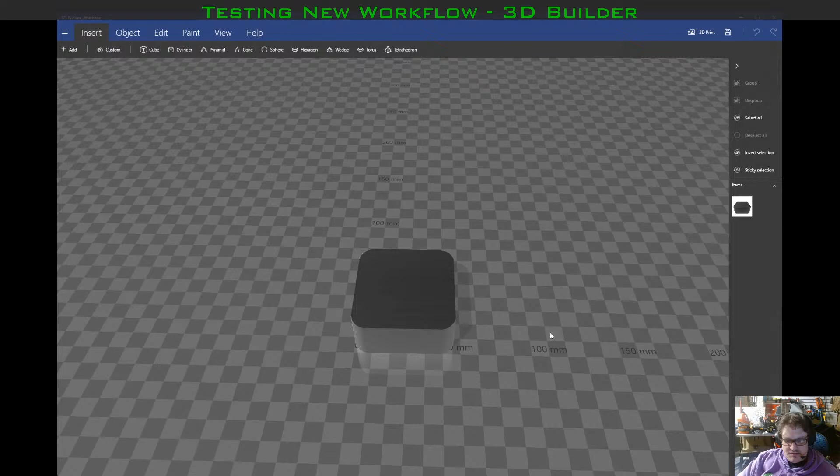Now we are going to go to Microsoft 3D Builder. Insert, add, load image. Base. Turn on the inverse. Alright, so this is the base that we're starting off with. This just started off as the thing that Microsoft Paint imported into 3D.

So we're gonna probably make this 4 millimeters thick. And the model that I based this off of has some screw holes to screw it on, and then a post that would come out for the mixer. So I'm going to use some calipers, measure the width of this post, maybe even just the opening and the thing.

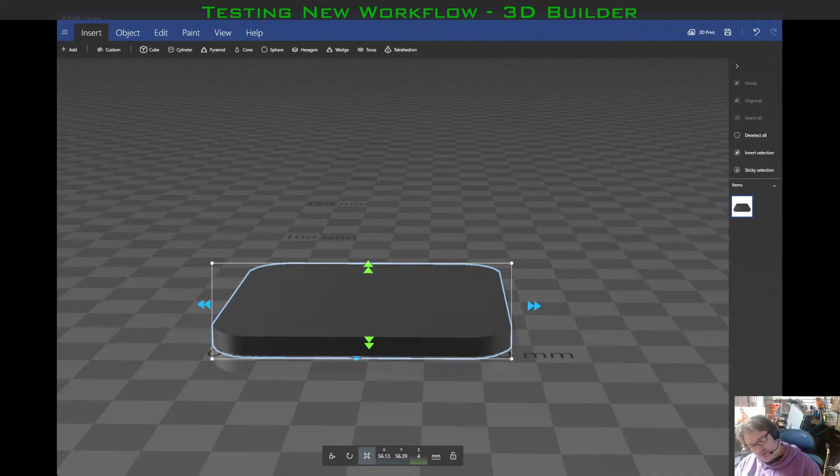I did scale down that original design a little bit in order to get it to fit, but alright, so the opening here is 11.88 millimeters wide. Okay, this is 11.4 millimeters wide. Let's go with 11.5. I think if we did 11.5, we could probably get away with it. Yeah, 11.5 seems to be a good starting point. Okay.

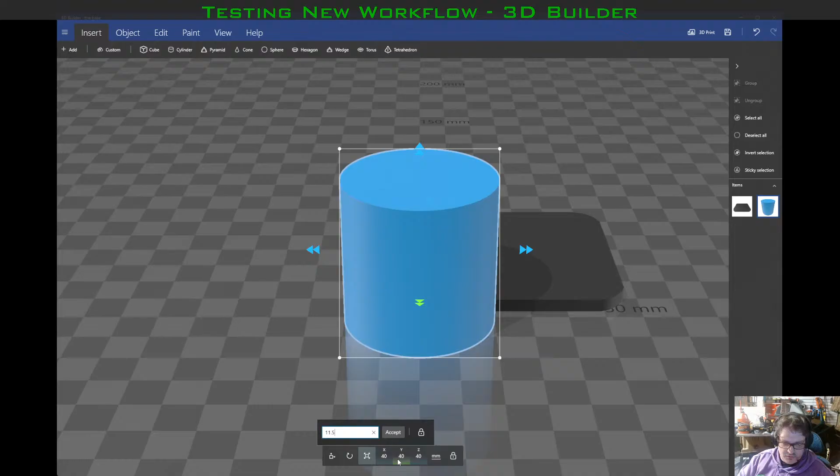So, insert a cylinder, scale that to 11.5 millimeters. And unlock the scaling. Drag it to about the middle of the thing here. Like the middle.

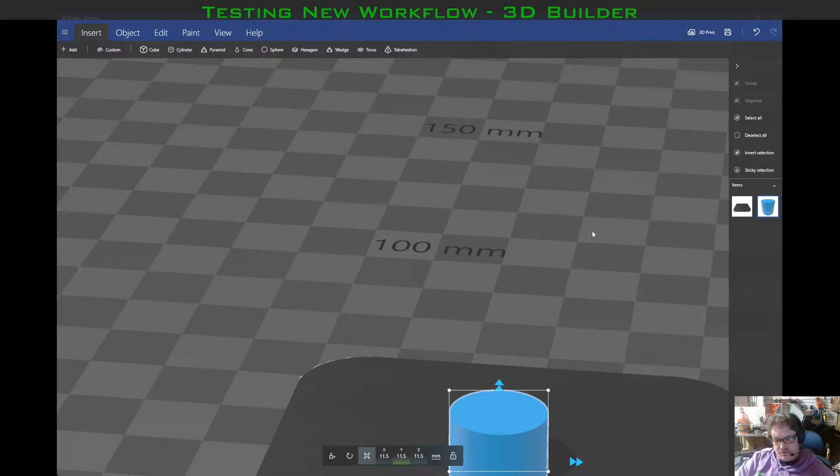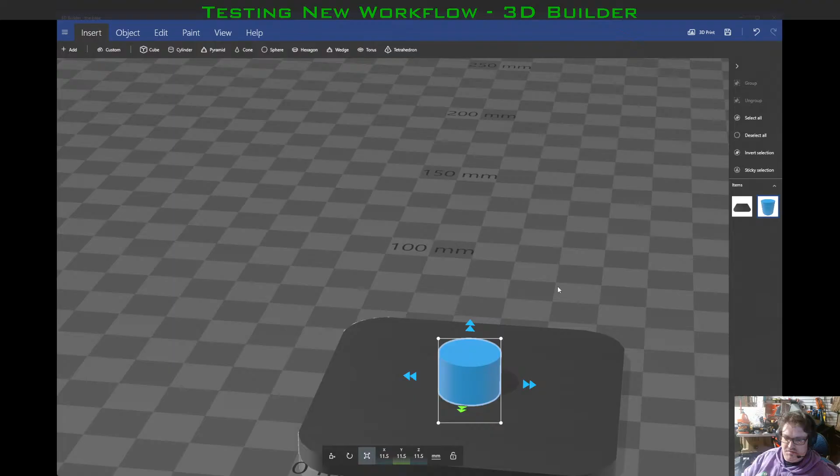And then, alright, so this is going to basically hang like that. So probably, if this were to end here, probably gonna want to give it 37 millimeters of height. Seems about right. Okay, so let's extrude this up to 37 millimeters. 37 millimeters of height. Okay.

And this model is about 4.19 millimeters from the tip of it where the jutting out starts. Which makes sense. Is that 4 millimeters? Yeah, it's about 4 millimeters.

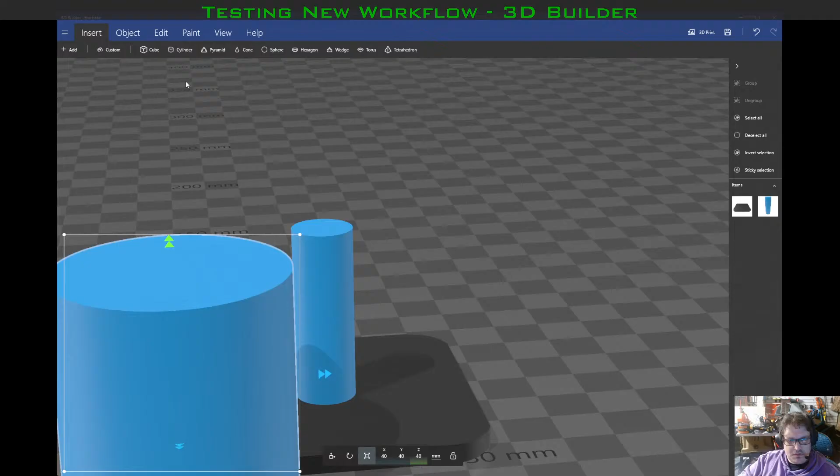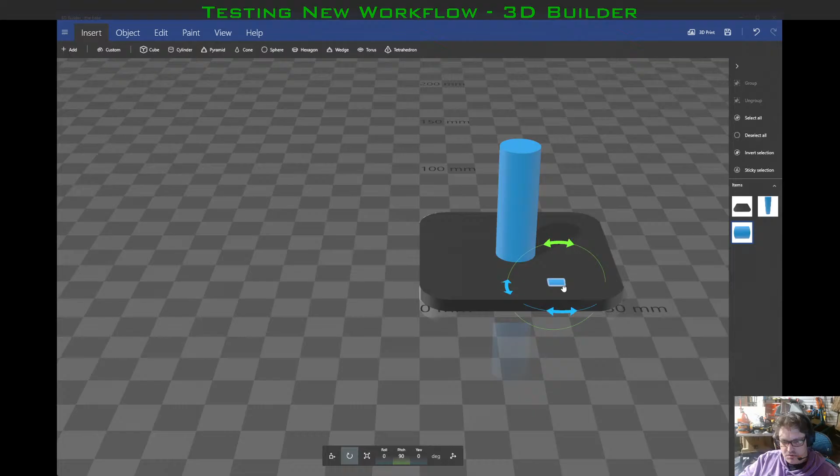Alright, so I'm going to insert another cylinder. Lock it. I'm gonna set it to 4.4. Rotate it 90 degrees. Stick it on this. Alright, so it's got to be 4.4 wide. How deep does it need?

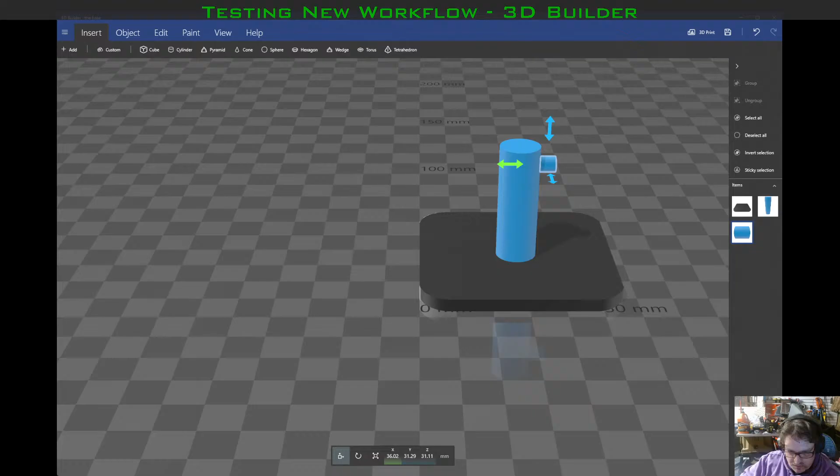Let's see here. Probably be... let's go 2.85 deep. So go this way. 2.85. Unlock. Up. Okay.

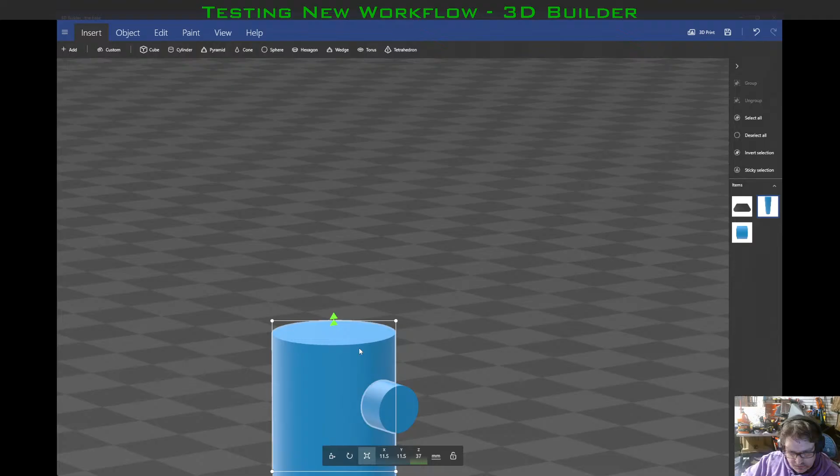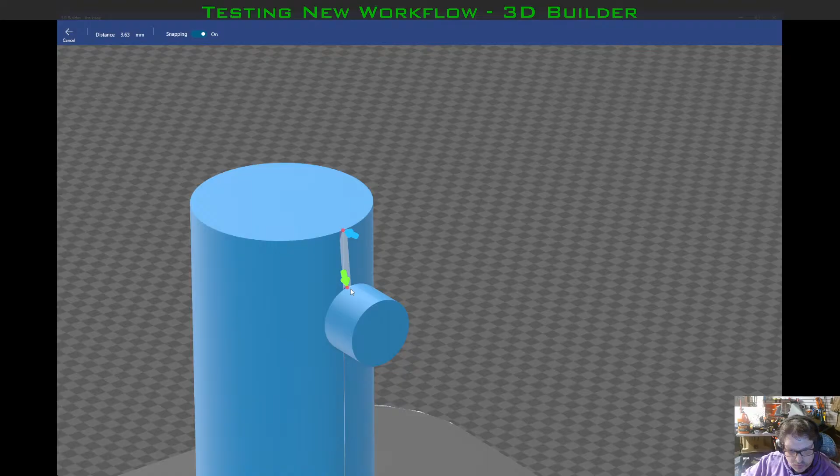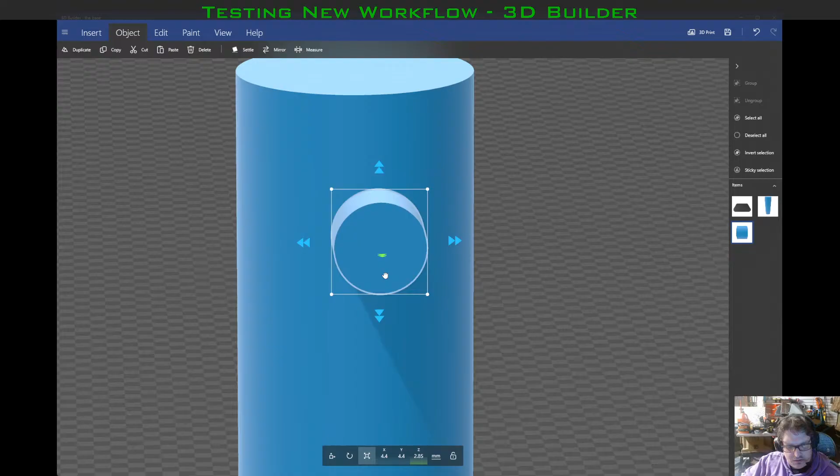Now we're gonna measure what? 4 millimeters from here. Right, so that's 37. To here. That is 4.07 millimeters. Okay, so there, 3.5 millimeters. Okay, so this needs to move down just a little. Oh, yeah.

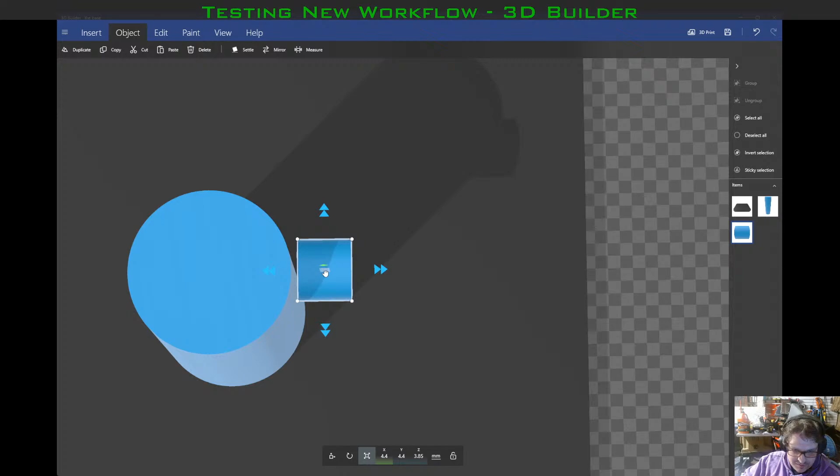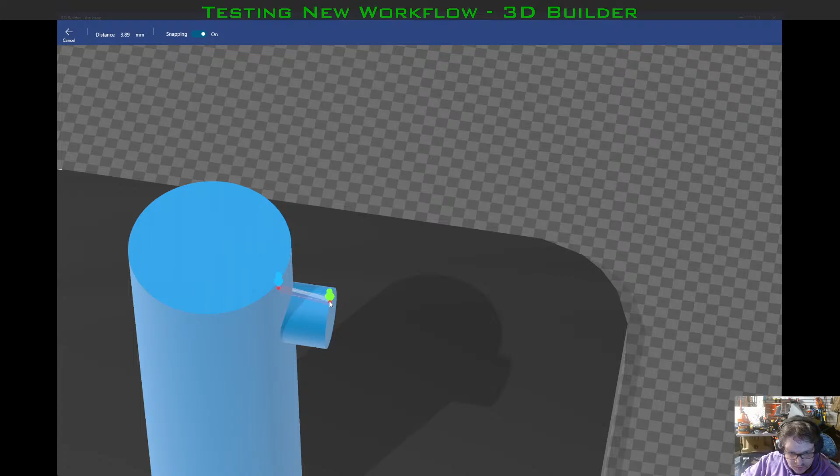Alright, so that needs to be 2.85 visible. Uh-oh. .85 visible. There we go. Measure from there to there. 85. There.

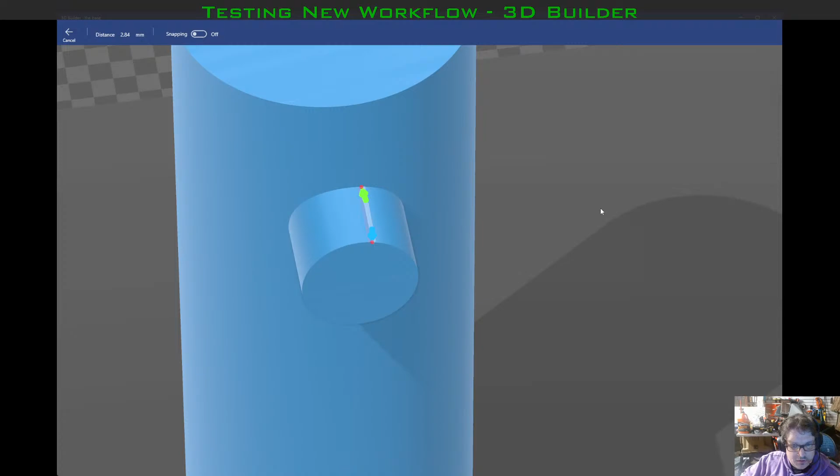Stop snapping. Snapping. Alright, so that is 2.84 wide, 2.84 deep. Yeah, that's about right, that's about what we need. So I think that this may be my model.

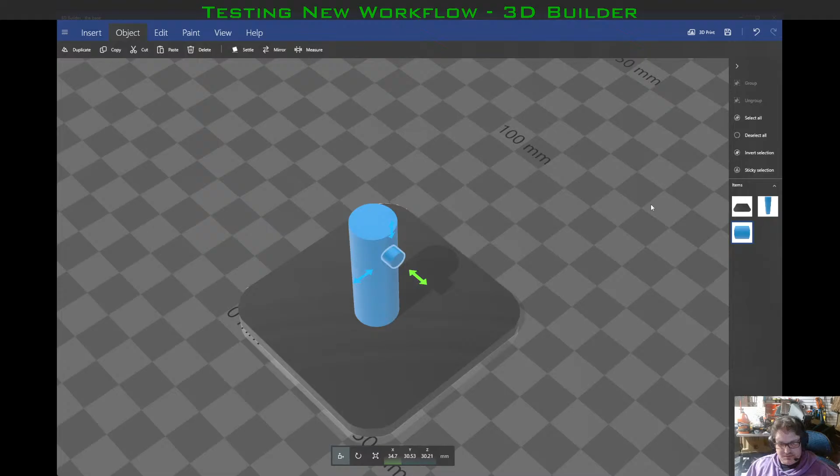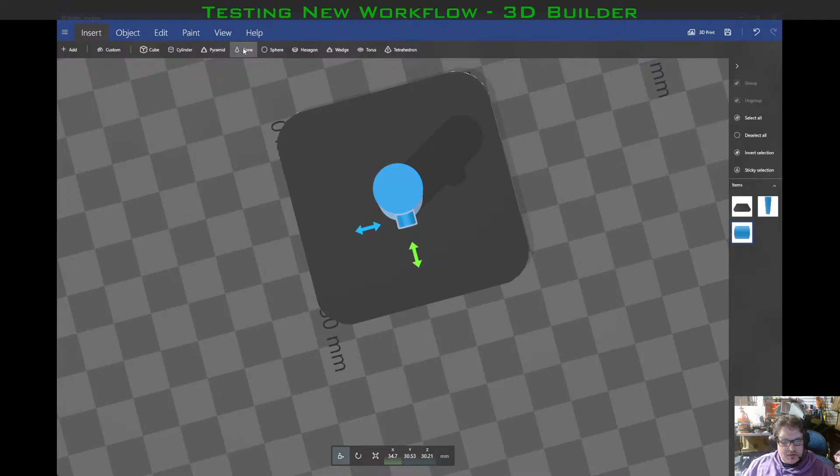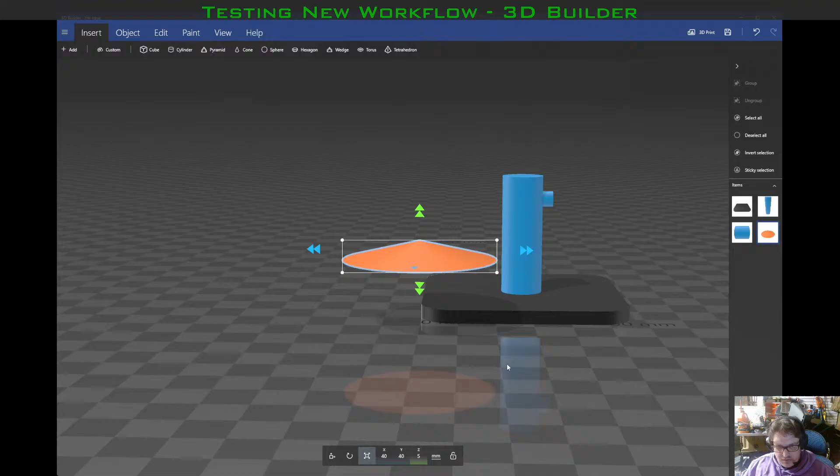So next thing that we're gonna do is take a coarse drywall screw, and the coarse drywall screw is 8 millimeters around in the head. So we're going to insert a cone. It's going to be 5 millimeters. Start. Scale. 5 mm. 5. 5. 5.

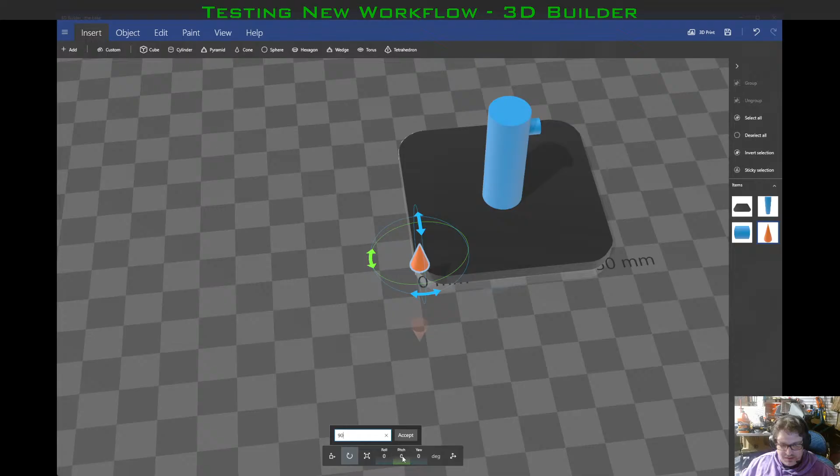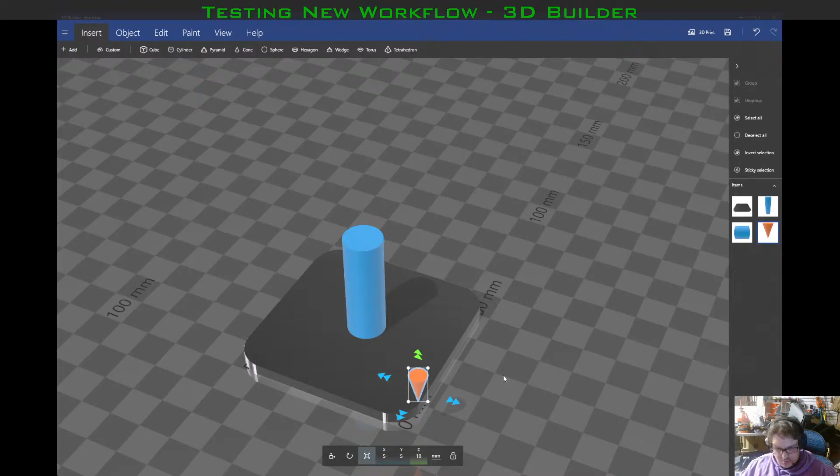Alright, then we're going to rotate it 90 degrees here, 180 degrees. Okay. And I'm going to put two of these. Oh, that's not going to work. That's not going to work at all. This is going to have to go all the way through it. So, do 8. 8. Accept 8.

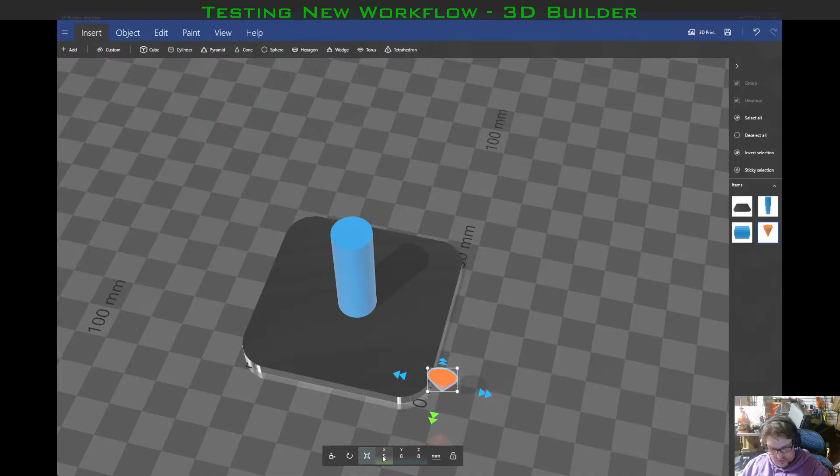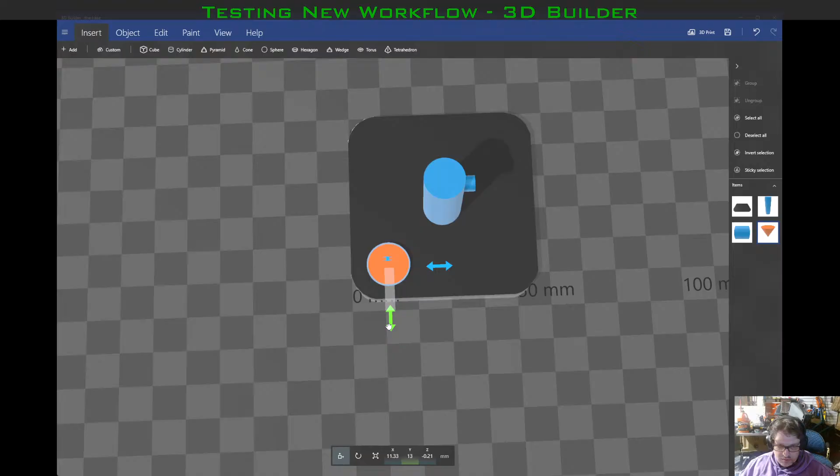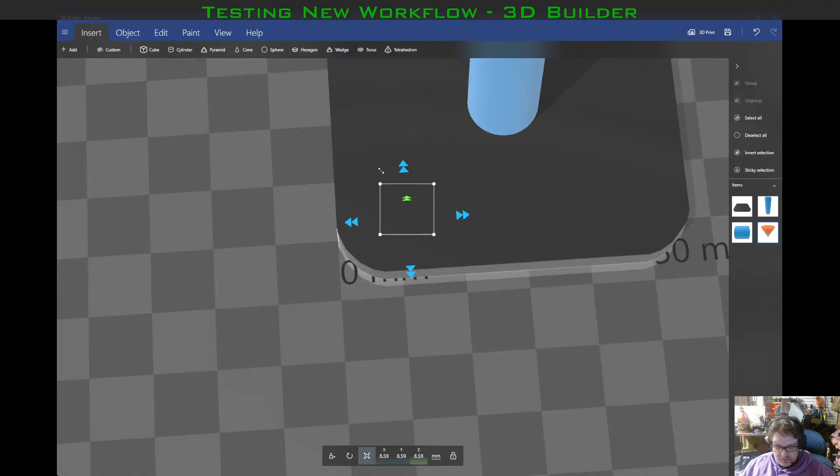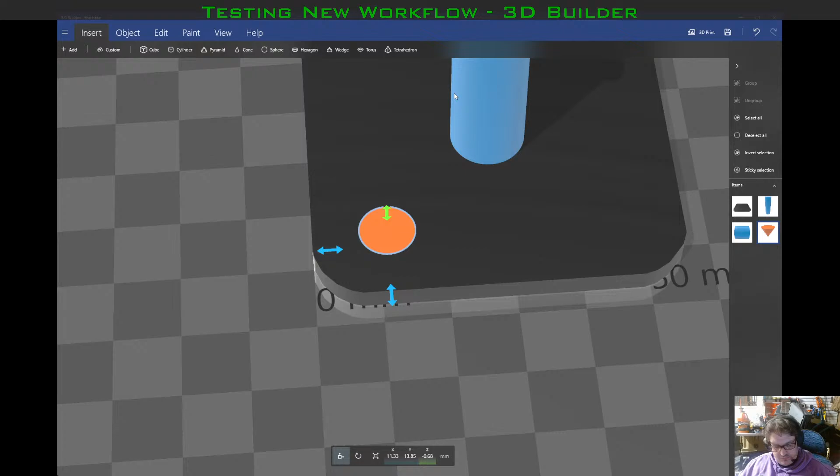Let's lock it, scale it. The top of it is 8. I need this to be... you can drag it up. Okay. I'm gonna copy that, paste it. I'll put this one, another cone.

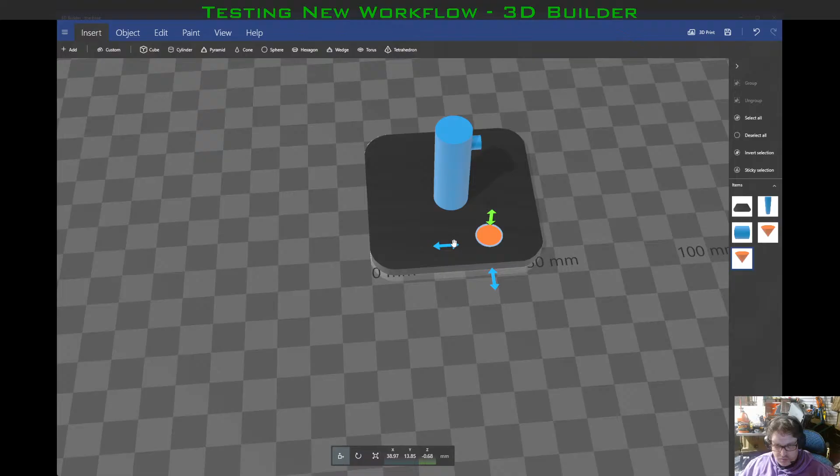And to edit, and we're going to do subtract. So let's save this, save as the whole thing. We are also going to save it as a STL. Okay, take this and we're going to subtract.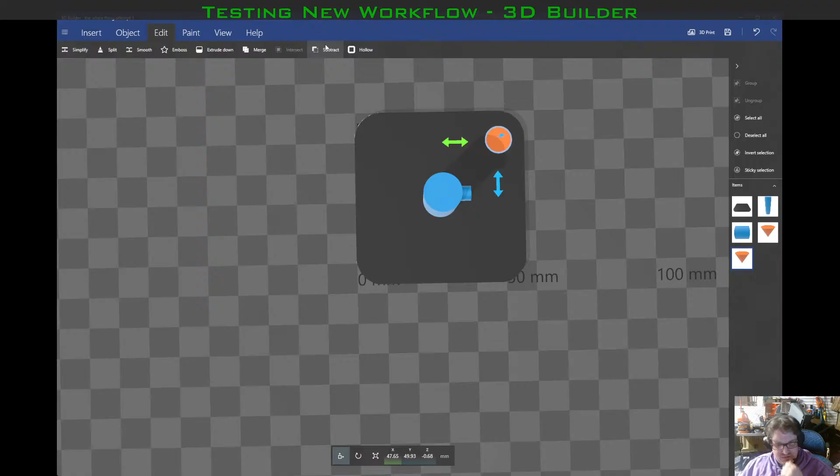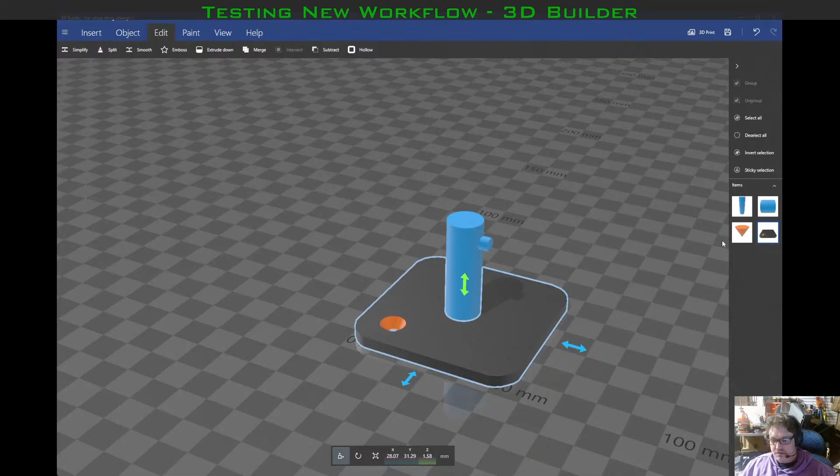Model, but it didn't. Up ever so slightly. Deselect. Up ever so slightly. Subtract. Go. Up ever so slightly. Subtract. Go.

Alright, so it's probably not symmetrical. Actually, it's definitely not symmetrical. But I think that this could actually do it. Alright, so save as M20 3MF, save as one STL, as, and then let's go to Bambu Studio.

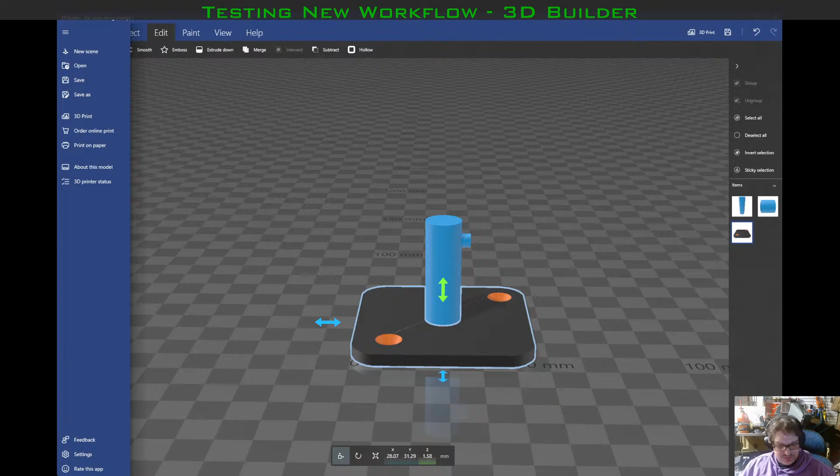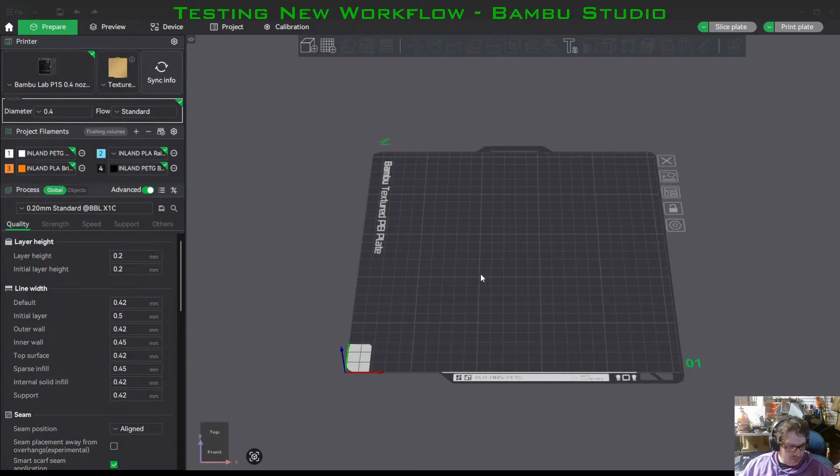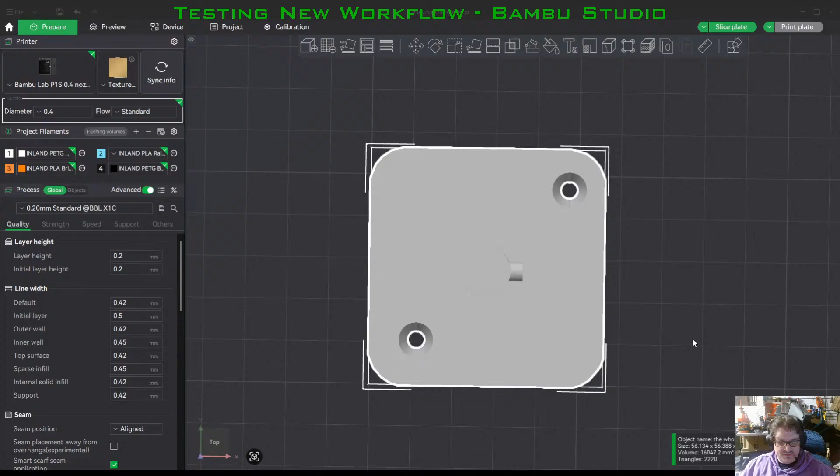Okay, so Studio, to import the model that we made. See if that works. Yes. Alright, that looks to be about what it should be. So yeah, those holes definitely aren't symmetrical. It's not what matters right now. I think I want to print this in black.

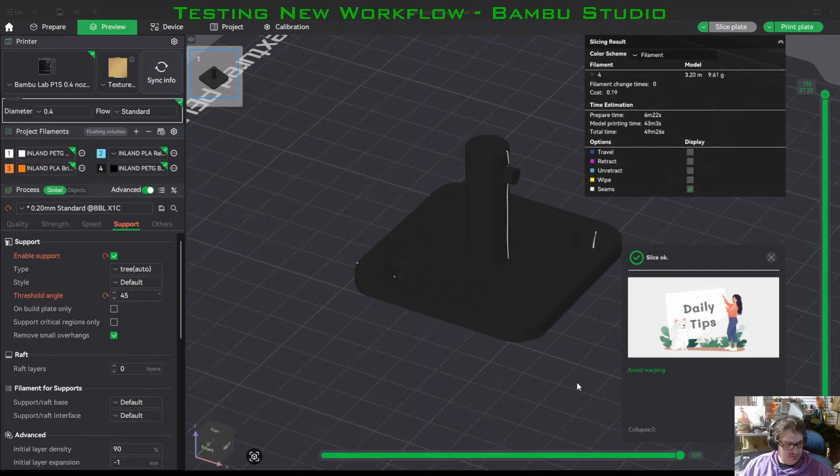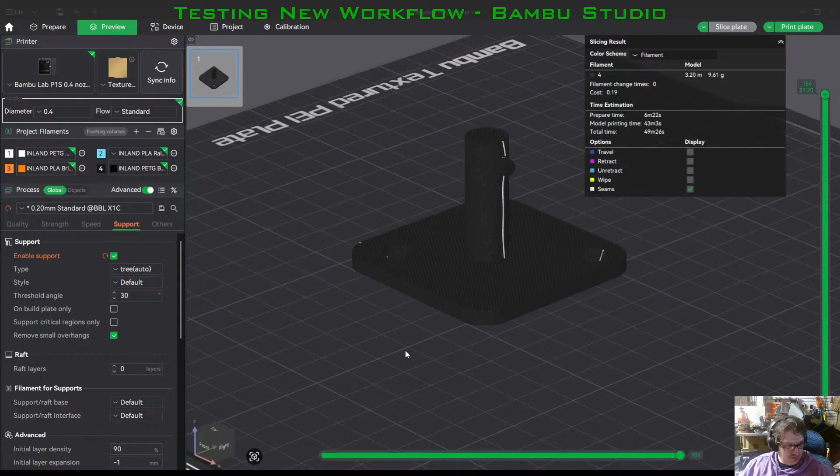To enable supports, tree supports, slice plate. How are you going to do that without supports? How's it going to do that without supports? How would it have done that without supports? Yeah, because when there's no supports and you have an overhang like that, especially with PETG...